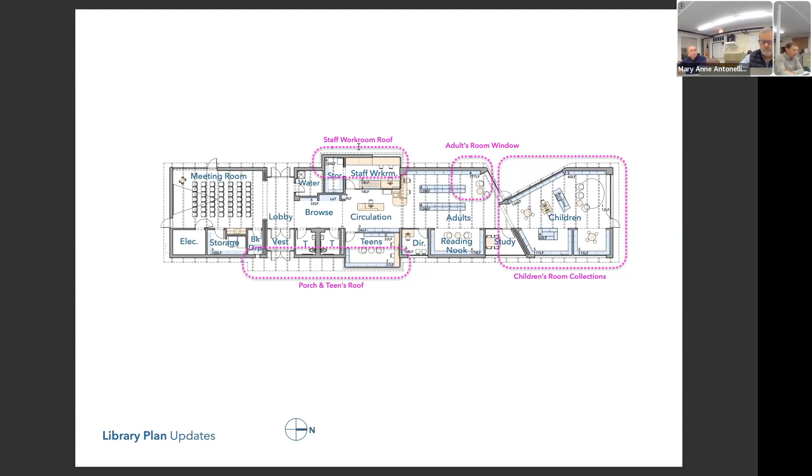In previous discussions, we looked at how we might incorporate additional seating in the adult reading room, including a study carrel with a window. For the roof design, we looked at consolidating the roof so it also covers the staff workroom, porch, and teen room.

Starting with roof updates, here's a view from the northwest showing the original flat roof condition over the staff workroom. We've looked at continuing the gabled roof to cover that portion and unify the roof design. This simplifies the detailing and allows for more efficient construction. The bar scheme of the project and the widening of the staff workroom and storage room allows this move, and it feels well planted as you see it here.

Moving to the northeast view, you can see the entry condition with the teens and porch roof as a flat roof, disengaged from the gable. Here's a revised version where the gabled roof pitches up and creates an upturned roof. This is a great way of managing water and snow at this entry condition. Since we have the porch roof, we need to protect patrons entering the building. This allows for a larger window at the teens room, which we think is a nice moment for that space, and we're again consolidating structural elements. The glulam rafters intercept from the gable and upturn into this entry porch condition.

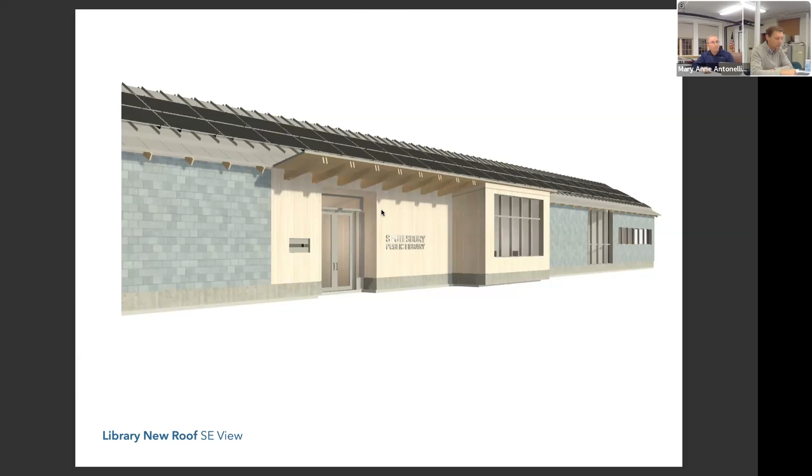Moving on, you see a more zoomed-in view of that upturned roof, and again from the south side. We feel this upturned roof really gestures toward and is an inviting entry to the entry sequence for the building.

Would you see that structure inside? We modeled it here so that the enclosure just folds in and you don't see the structure, but we could look at having it exposed in the vestibule too. It's possible—all of the ceiling material would be sitting on top of that structure, so it's doable.

So this was the last image that we had for the new roof. The next portion will be plan updates.

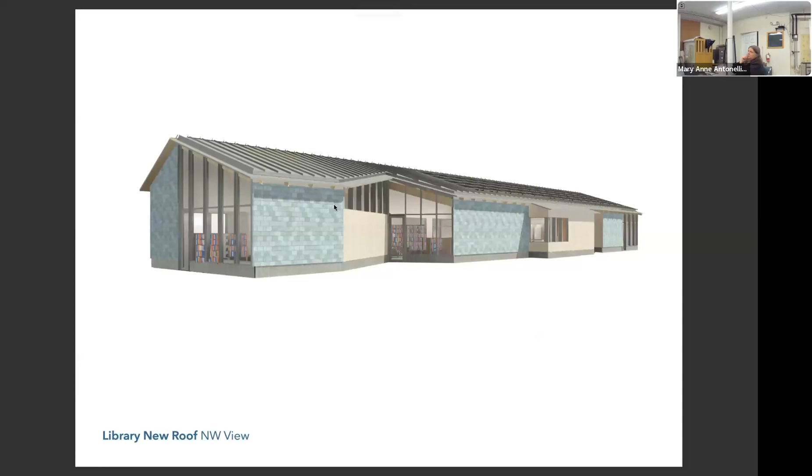We can't have it sloped down because then it doesn't provide the cover that we need at the front entrance. You don't want to enter into the building under a sloping eave. We've got to have some way to stop water and snow and ice from coming off the roof, or icicles collecting there.

So in a way, this upturn is acting like a giant gutter effectively over the door. It's stopping the flow of stuff that's coming off the main roof. It's not dropping down onto a low roof, so it simplifies the construction of a low roof that is then flashing up into a wall.

Every time you have a transition from roof to wall to roof again, there's detail there that has to be worked out and waterproofing that has to be worked out. So by eliminating two of those transitions, we feel like this is potentially a better solution in terms of creating a watertight thing.

But the other thing is the valley where the two roofs are meeting is actually outboard of the exterior wall. So if there was a problem there, you're beyond the exterior face of the building, and so you'll see it. It's not hidden behind a wall. But we also think we can detail that transition in a way that we'll be pretty confident, I think, in its performance.

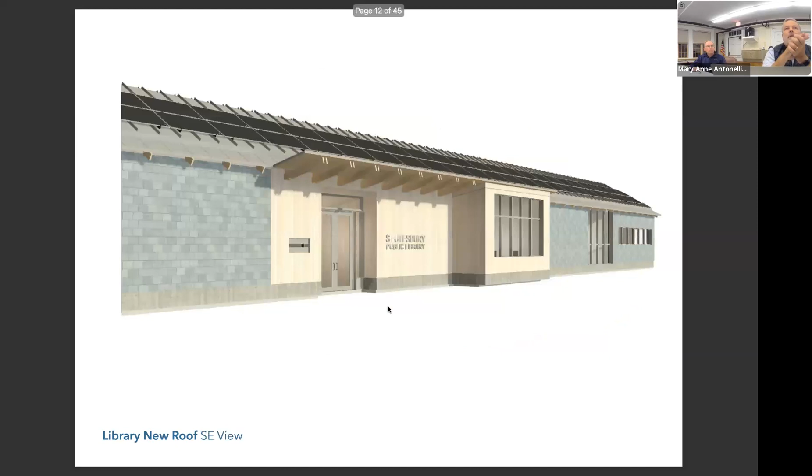So if the whole roof slopes down, but you kind of bend up the corner of the roof over the front entrance, it meant you had a sort of sloping angle, which didn't feel right to the building. But whether it's a kind of folded thing or two different tabs, our feeling was that the length of those segments felt like there was too much going on.

It was a single move - whether it's flat like in the previous version, or like this with the same move all the way across - felt more appropriate in terms of the scale, given the length of the building. It needs something of a certain width that's substantial enough.

It doesn't come far enough off the building because we're limited in terms of the square footage we have available, with 5,000 square feet. So we can't have an 8 or 10-foot deep porch, and so that relatively modest projection needs to be balanced, we think, by some substantial width.

Will you detail that as a porch under the overhang by the door? So there could be a chair under there? That's right, it will be a paved or stone surface - hardscape that would take the whole footprint of that roof.

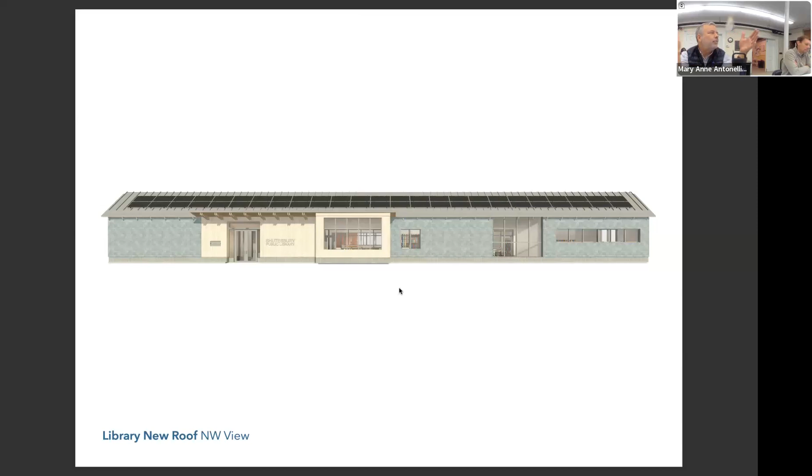I understand what you're saying, and we're limited - the lobby, everything's gotten pinched down. The door is as wide as the lobby is, so it can't get wider than that. We can't get more glass at the front entrance because we don't have the room inside to do that. There's a book drop on one side and a bathroom on the other.

Could we play around with lining that opening with something other than wood? Yes, we could think about what that might be. I don't know off the top of my head what we would do there, but there might be a way to introduce some other material that draws more attention to it.

But our hope was that the wood, as distinct from the slate, combined with the wider roof and whatever is happening at the ground plane paving and landscaping, was a big enough gesture, despite the width of that doorway, to signal this is entry.

So there've been a couple of times, like the teen room is getting more space, the staff room on the other side, the ceiling is higher, and there was more storage. And so anytime I think more, I'm worried about the budget, and I just want to make sure that we aren't doing anything to let this budget creep up, because we can't let the budget creep up.

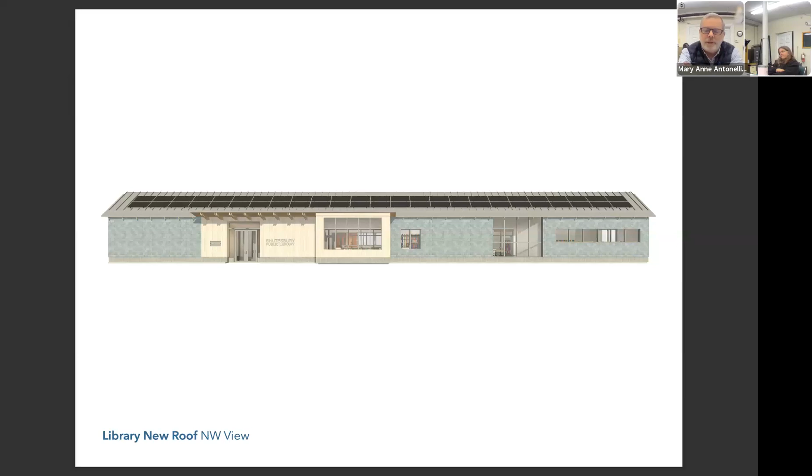I don't think we actually need the heat tape. The heat tape came up in the design subcommittee meeting. Stephen brought it up as a possibility here. And I think we're not gonna need it. I think we can detail this in a way that snow is managed, and Dale, we had this conversation about snow last week.

The way that we're gonna deal with snow at the front entrance is the same as the way we're dealing with snow on the rest of this roof. We don't want the snow to sheet off the building. We want to keep it on the roof. We're gonna have snow rails along the entire length, both sides, to hold the snow on the roof and give it time to melt and drain off as liquid, not slide off as ice and snow. That's the plan, and the same approach would hold true for the front entrance.

That upturn is preventing snow and ice from sheeting off the main roof over the entrance. From there, the plan is that we'll have along the length of that roof a cricket, and we're actually thinking that the back side of that roof could be all heat-welded membrane with tapered insulation to get a cricket in there that's directing water off to the two ends. We're still sort of trying to figure out how we're going to convey water down from the two short ends, but it's very possible that we'll end up with a scupper condition and a downspout there. But that's something we've got to work through.

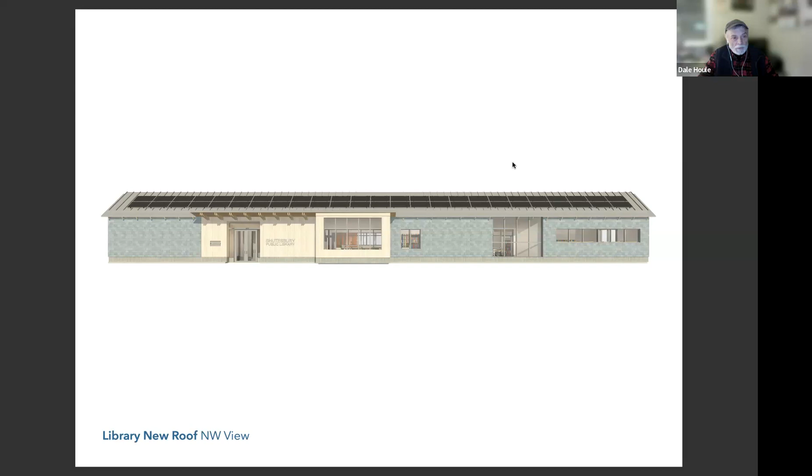Well, yeah, I agree with that. It's just the whole idea of the subject matter. I mean, I agree with everything you just said. Any other questions about the roof before we move on to other items?

Right, moving on. I had a question about windows. Oh, sure. It came up briefly at the subcommittee meeting last week, the idea of stealing one of the windows from the teen room and giving it to the study room or the reading nook. Is that cost prohibitive? It's not, and we are developing ideas around that.

I do have some exterior imagery to show of the adults room. So we were investigating how we could introduce an extra window into the adult reading room as one move. And we are still developing what this teen room window could be. I think there is room here to investigate potentially more solid wall.

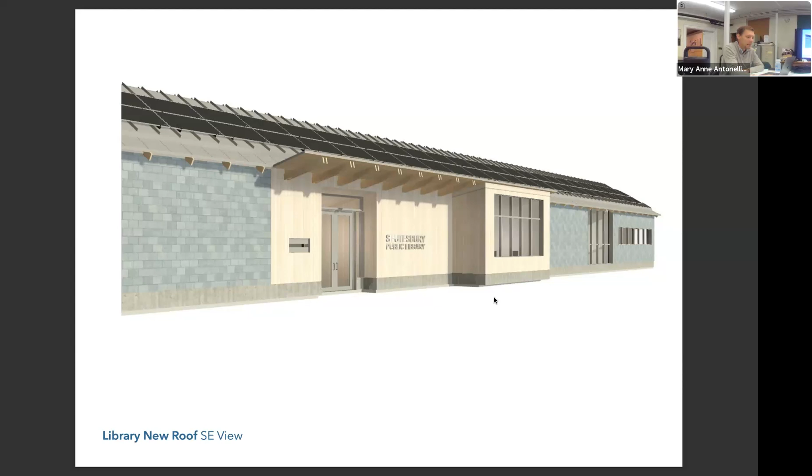And because we have such a large window, it might be able to yield some more collection storage along that wall, and then we could turn over that glazed area to another space. So I'll show you what we've developed—it'll be a few slides down, and we can investigate that there.

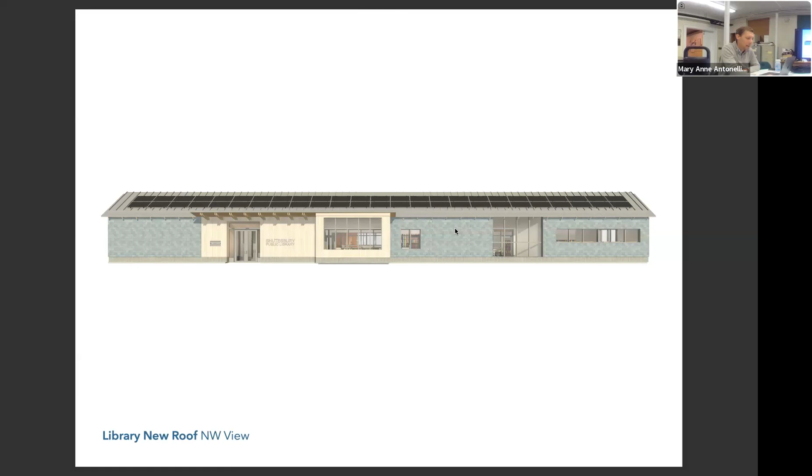We felt, looking at your question specifically about the reading nook, that another punched opening here was starting to be too much on this elevation. We already have so much glass with the study room and the teens. Yes, we could reduce the glazing here, but we looked at a few different layouts, and introducing another window at the reading nook didn't feel as balanced.

Just for orientation—if you go from where your cursor is to the right. That is what space? The study. Oh, yeah, the study. So this is the study room.

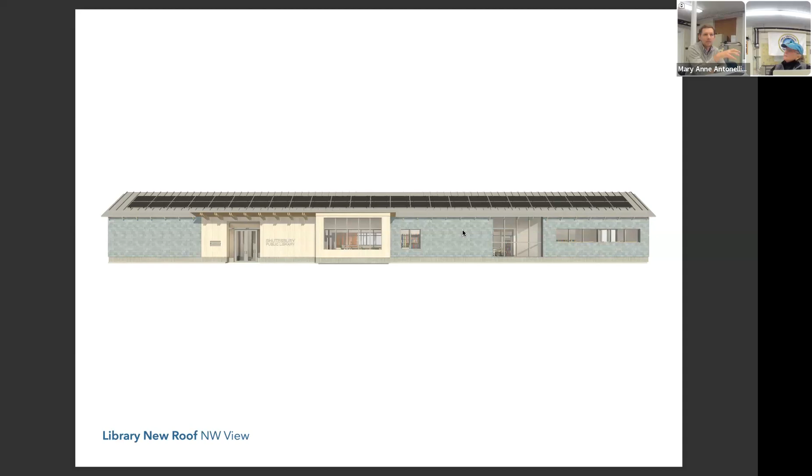The adults' reading nook as well—we're trying to maximize shelving there. We have a good opportunity to do that with that solid wall. Also, when I get to the plan, the way a study carrel at the wall implicates the use of that room a bit, with the soft seating centered there—we felt there's a bit of a clash of people coming in using that study carrel and then leaving. It didn't set up as quiet a space as the reading nook. It would be problematic and useful, so a few considerations there.

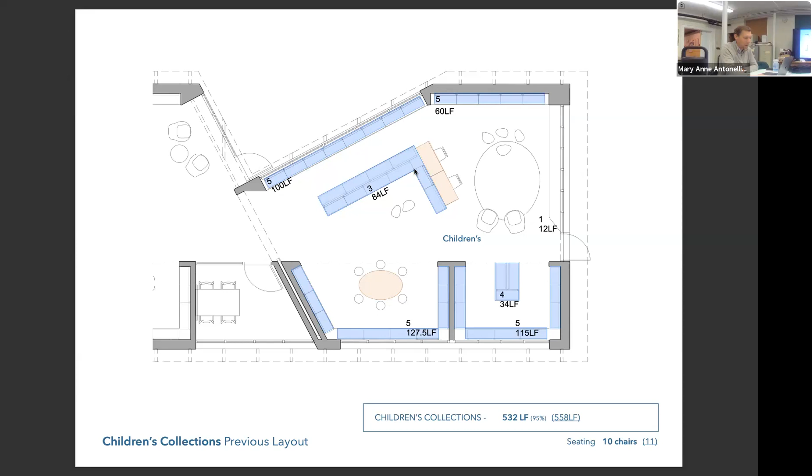Continuing from there, there was a request to make this bank of freestanding shelving mobile. If you look at this, it was a little challenging to incorporate in this layout, because if all of these were mobile, it wouldn't really work as a one-sided unit to close the L here—and we have offset shelving here because of this corner.

So this really streamlines the ability for mobile shelving to be arranged like this. It frees up the children's computer table, and we feel there's more flexibility in this layout in its entirety, while our shelving counts are still at 95%. If you're really considering this open space for flexibility, the current layout sets you up for that—we'd have 3 separate mobile shelving units here in a line, so you're close to the same collections, with more flexibility.

We incorporated 2 tables and chairs here in this reading nook—you could break them open and have different programs here. So that was it for children.

What are you showing along the window? So the window area was originally a bench with shelving, a single row of shelving underneath. We're now considering this as mobile shelving, so there would be 4 banks of 3-foot wide, single-face countertop shelving, but it's only one row high, so it's still about 18 or 20 inches tall—keeping the views to the north out of this window, and again allowing you flexibility.

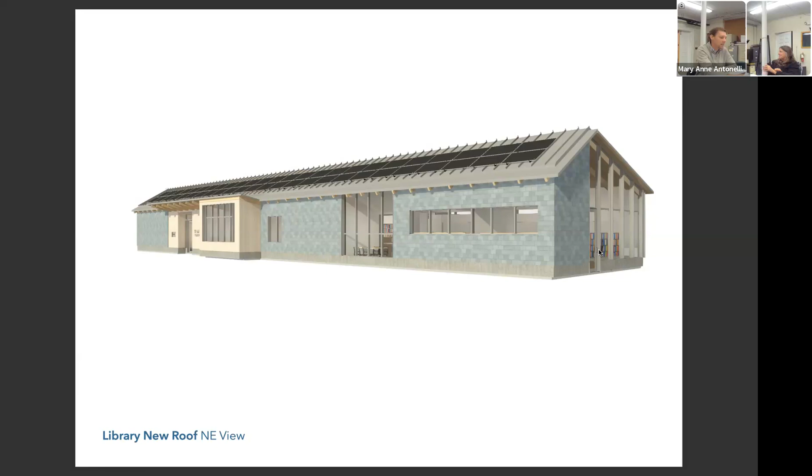I'm also wondering how we treat the jamb conditions. Do we pull the east jamb of that window further west and allow for the tall shelving to wrap across the north, so we can still have a nice full-height condition? We're making that less wide, but you can see in this image that you have that water table condition, and it's a rule that follows around. How we detail this, we wouldn't want a sliver of slate here - that doesn't feel right. Extending the water table up - why don't we look at it and see if there's a way to resolve that condition?

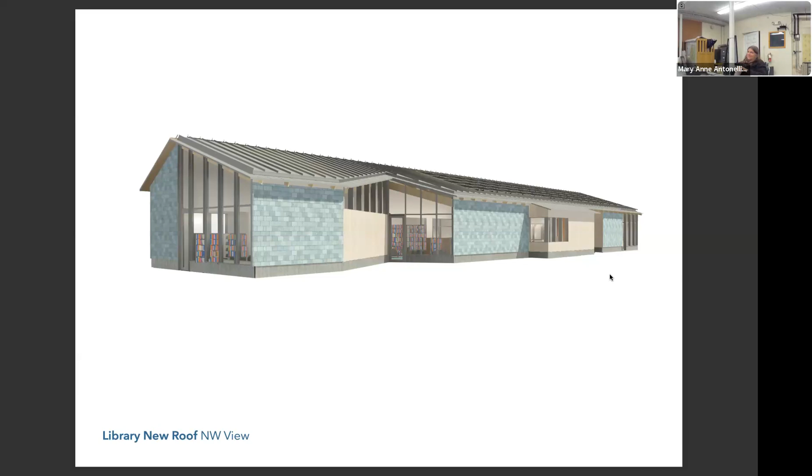Is that your preference, Mary Anne, that it's taller there and that accommodates one row of cubbies and then one row of books on top of that? Or it might just be two rows of cubbies. I could see that being two rows of cubbies. But if it's two rows of cubbies, it's kind of the same problem as if it's one row of cubbies - where does that collection go in that room?

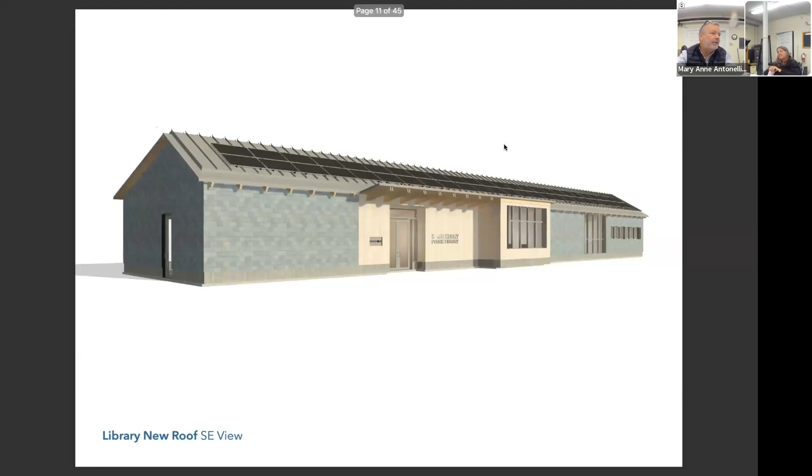Right now, we're accommodating collection there. The collection is not just books - the collection is also things. So the collection is kits, chemistry kits, storytime backpack kits, puppets and puzzles. Some things like board games and puzzles will work very well up on top of the shelving on the sides, but it might be nice if some of the kits fit into those cubbies, since some of the collections are big bulky things.

What I'm asking is, we know we need some collection - whether it's traditional book collection or objects and toys - at that location. Do we know that we need two tiers of collection there? No, it could be one tiered collection and one tier of toys. That's quite a bit of room for toys. Books could be on one shelf, or toys that you check out.

On one shelf, and toys that you play with in the library on the other. So, back to my earlier question, how much of the non-book collection items can we assume are sitting on top of the wall shelves, if any?

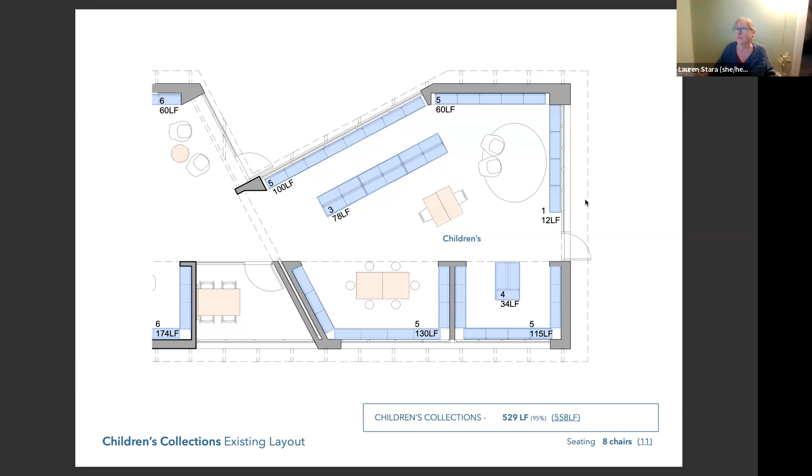I can also see it's gonna be a long time before the shelves are full - we're not gonna move in year one with the shelves full. We'll move in and over time they'll fill up, so some toys could also be on the bottom couple of shelves in that corner. And we might find that nobody ever sits at that table, and we move it somewhere else, or get rid of the table and put some other kind of thing there. So I think there's room for flexibility and certainly plenty of room to start out.

The other thing is that toys, both toys to play with or other things, can be on display on top of that - that's gonna be a flat surface, that row of 3-foot high shelves, the freestanding one. And then this section over here, even in the alcoves, the wall shelving there, you'll have room to put things on. So there's a fair amount of display surface in the children's room - pretty much every surface of shelving, with perhaps the exception of the one at the window.

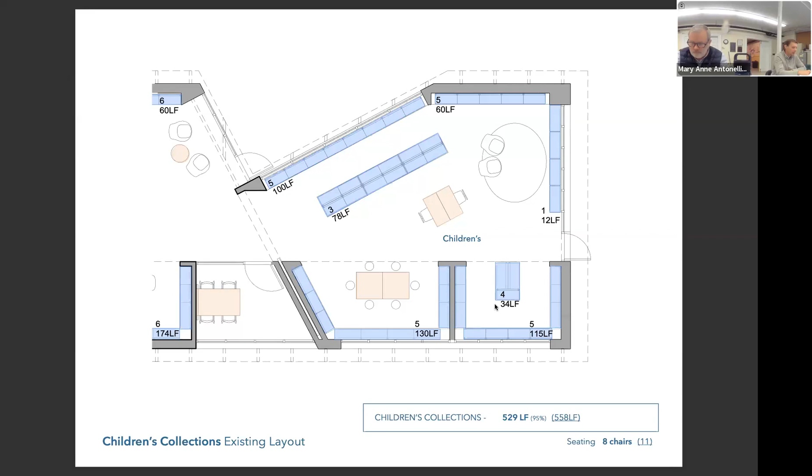So moving on to adults. Here we see a plan of adults, and we've been looking at how we might be able to nest a study carrel in this west wall.

Again, here we were looking at adding some flexibility for patrons, giving them another surface they could sit at. We find that this condition in other libraries is heavily used, and it's kind of a real go-to for people to do some studying or reading.

So if we look at the numbers, this takes a little bit of the collections numbers out, because we've removed some shelving here to open this space up. But we've given adults - there's still the collections shelving that is outside of the teens room. So the teens room is at 100 linear feet, the target is 120, so teens is a little under. But if we give this shelving over to adults, we get to 554, so we're around 95%.

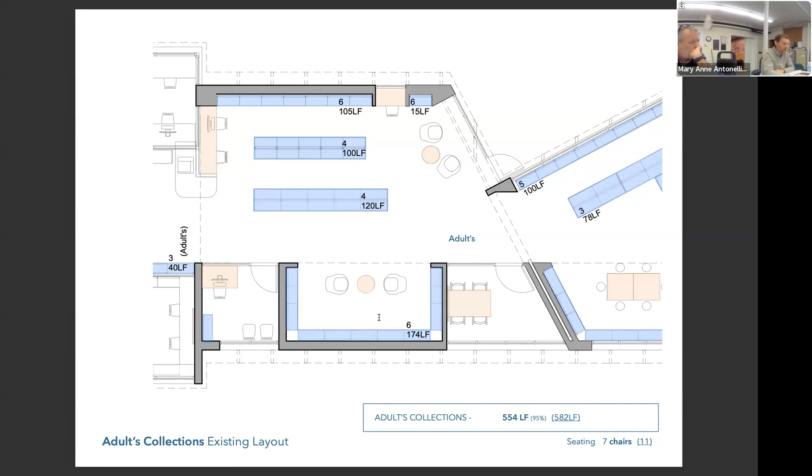Again, Penny, we were looking at conceptually how we could locate a study carrel centered here in this room. We just felt that with people coming in and out, there's more circulation - people would be coming in and out to browse anyway - but that kind of conflicting programmatic use in this, what we consider a more quiet area, in turn with the exterior layout of a window here in the elevation didn't feel right.

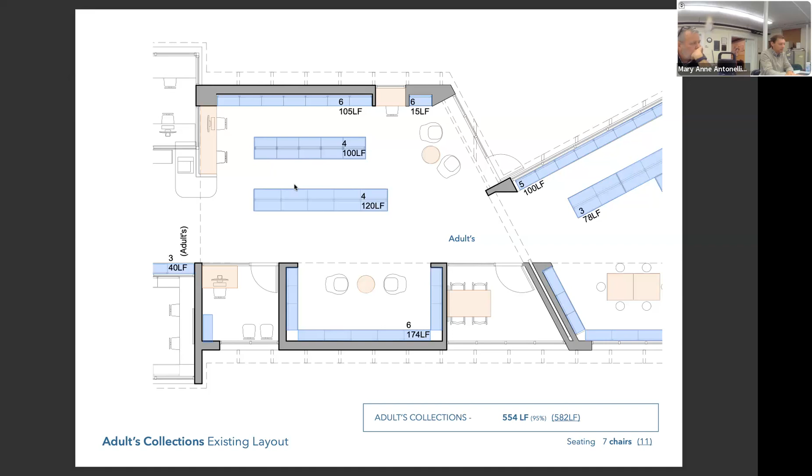So this is the plan. If we go to a cut section, orienting yourself, you see the meeting room to the left here, moving through the adults room, you can see this window condition here, this study carrel. So again, it helps open up this moment here on the north side of the adults room as well, with the soft seating in front of it, that north facing window, and then the study carrel adjacent to it.

Everybody is gonna want to sit there. Everybody. In Norwell, that's where everyone sits, and they're spaces. And it's too bad we don't have enough room and money to do more of those. It'd be great if this project could just grow a little more. Wouldn't it be great? So Powerball is up to, I don't know - did nobody win last night? Not that I heard.

In lieu of Powerball. So we all wish and dream.

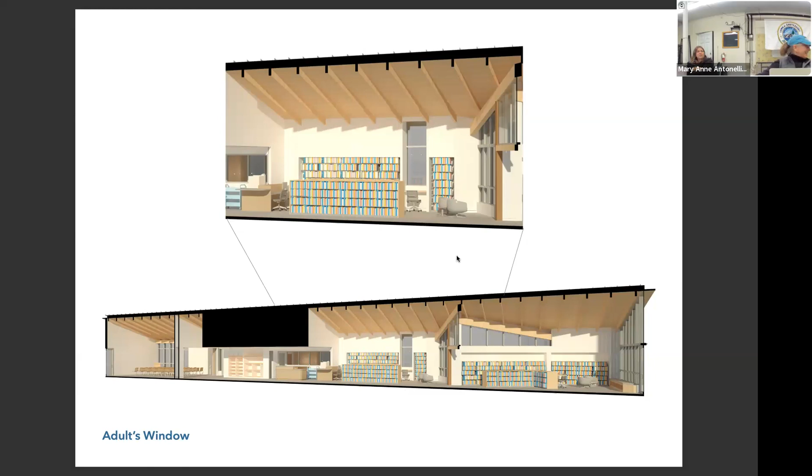Understood, but you gotta know, in that library, that's the only place anyone was sitting. Every single one of those spots was full. You're gonna have to take reservations. Maybe they'll have to pay to sit there. I don't see how you can do more, but wouldn't it be nice?

Yeah, I mean, doing more means reducing shelving, which we can't do. So even doing this was a little bit of a struggle to try to maintain shelving, because the other thing we had to do was pull back the freestanding shelf behind it in order to give enough room for the chair to pull out and have circulation around it. But I think that little seating corner is nicer with the staggered lengths of shelving. We agree with that.

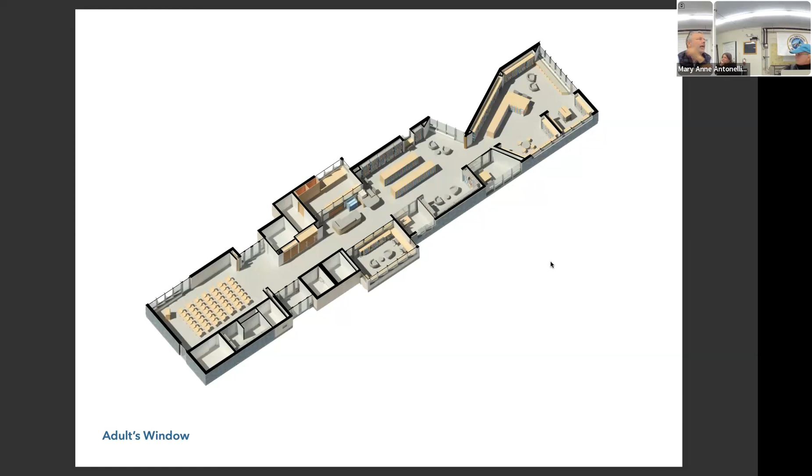So can we talk about the shelving in the teen room? I'm sure that I can suggest a place to put more shelving. I wonder where. No, this is always very fruitful.

So this plan is the updated plan with what we propose for children's and adults and teens. So what has changed here now with teens and the larger opening is it's allowed us to have 5 high shelving on this floor.

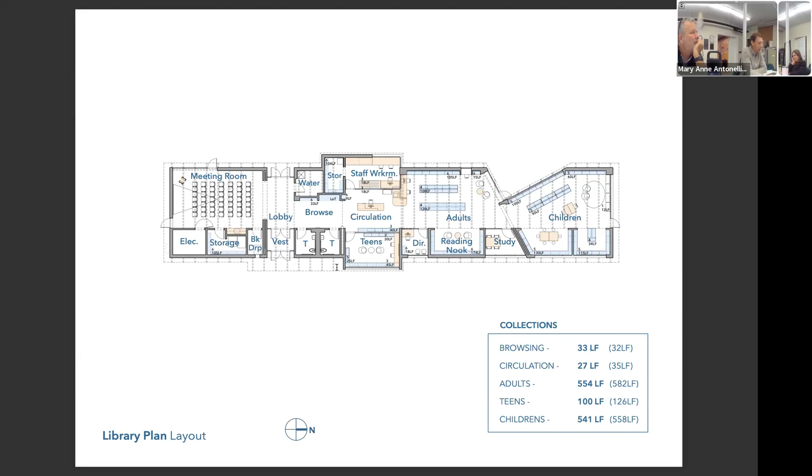Why can't we just have 5 high shelving on the window wall and have the window start higher up? I think that's gonna look a little awkward in that location with such a high sill.

We can look at it and see, but I think we could do a portion of that wall possibly with high shelves. Maybe, to the point that came up last weekend, Jeff raised a comment about that window, and we agreed that...

There's some work still that needs to be done with that window. It doesn't feel like it's quite right. One of the things we talked about was maybe it shouldn't be the full width of the room, maybe it should be asymmetrical. So if it was a third less wide and we gave over some of that wall space for shelving, and we didn't try to do window above shelving, we just said we're writing off this section of wall, and that's gonna be 5 high shelving that turns the corner.

And then we've got a window that drops down, kind of like the window seat in adults, that gives you a point where there's a lower sill and you can see out, which I think will be more pleasant for the teens, but also the circ desk wants to be able to see out that window too. When you're at that desk all day, being able to see into the teen room is important, but being able to see out to the outside is also nice.

That's one of the things about the Norwell circulation desk that we like, is that from there you've got a great view, not just of browsing, but outside, and you can see who's coming into the building, people walking or cars approaching. It just gives you a little more connection to the outdoors and a little more visual control, which we like.

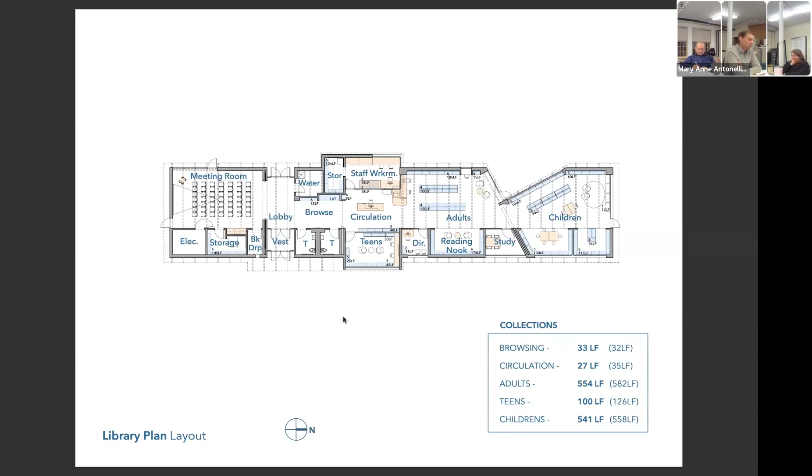All right, nice. Okay, so that concludes the plan revisions, and now on to interior finishes. So again, this process is really to read your temperature on initial thinking, and by no means are any of these finishes or color selections set in stone at this point.

So I shared this plan previously. We have different material finishes here. Resilient flooring in yellow, so the meeting room, storage room, book drop, staff workroom and storage, teens and children's study areas all have resilient flooring. We have a tile zone, which is the lobby, browsing, circulation, bathrooms. And then we have carpet, primarily in adults, also the reading nook and director's office.

We have a surface rug, which is currently shown for children's as well. These rose-colored carpets represent a second choice of finish—a highlight color. There's potential there for that. The white floor finishes are just concrete, sealed concrete. We have a walk-off mat for the vestibule.

Can you explain to everybody the bidding process, where even if you pick a color and pattern, it doesn't mean you're going to get it? That's correct. Jeff asked about the process for public bid and the need to specify 3 or equal, and the fact that you can't really predict which of those 3 or equal, or an alternative, is actually going to be submitted for the project.

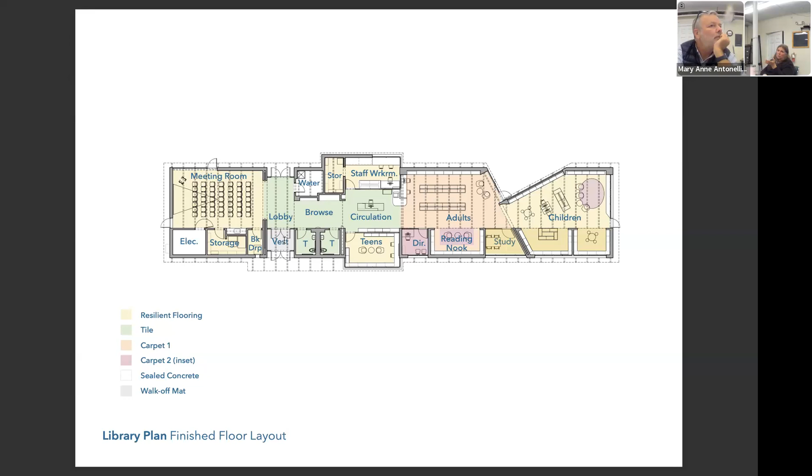Will we have to deal with the rain when we go in and out of those doors, or will they be shielded? We'll have some solution for rain diversion or collection at each of the egress points. We can't have roof overhang everywhere, but we have it at the doors on the far side of the lobby, aside from the front entrance, and at the two ends as well. People will mostly enter and exit through the main entrance, though someone might wander out the children's room door and back in, but not when it's pouring rain or there's ice and snow. Anywhere we have a door to the outside, it goes out to a paved surface, not grass that would be muddy, so if you go out and come back in, you're not covered in mud all of a sudden.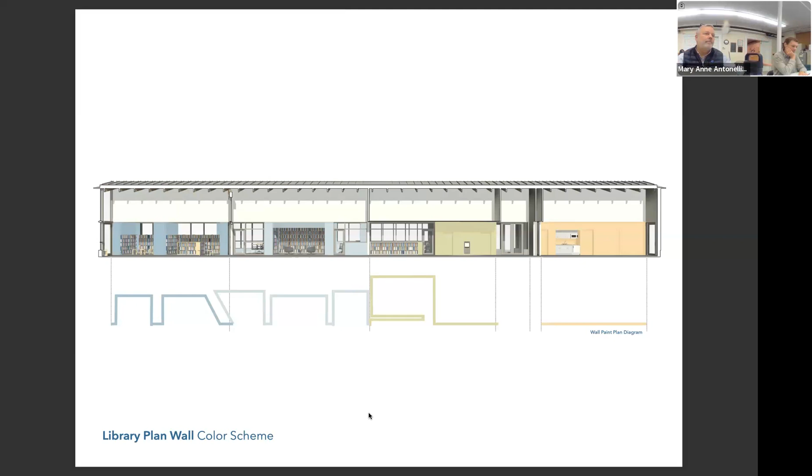So, that's why this meeting really is more about strategy than it is about picking actual materials or certainly colors and patterns. It's how do we feel about the strategy of introducing color in those small rooms as a way to create an identity in each of the different areas. So the meeting room has its own identity as distinct from the adult room. The study room is a little bit different from the main adult room, so there's a kind of hierarchy of space. It's a way to introduce color, break up the run of floor surface, having the wall color then inform the floor color in those smaller rooms, that might be a brighter color than a more neutral floor material that runs through the lobby.

It's not rubber, I think. I think it's lovely. That makes sense. We don't want it to be a uniform color throughout the entire library, but we want the colors to blend into each other.

I like, and I'm sure everybody here has their own preference, but I like more earthy tones, warmer colors. I'm a cool color person. I'm so tired of earthy colors. Let's not talk about what colors we like - that's a long way down and that's gonna be a very long discussion.

Let's do the cost estimate first. I do want to mention that having different colors in different rooms with different functions also helps with intuitive wayfinding, and it's much easier to say, this is for children's, go to the green wall or whatever - it can really help with navigation of the building as well.

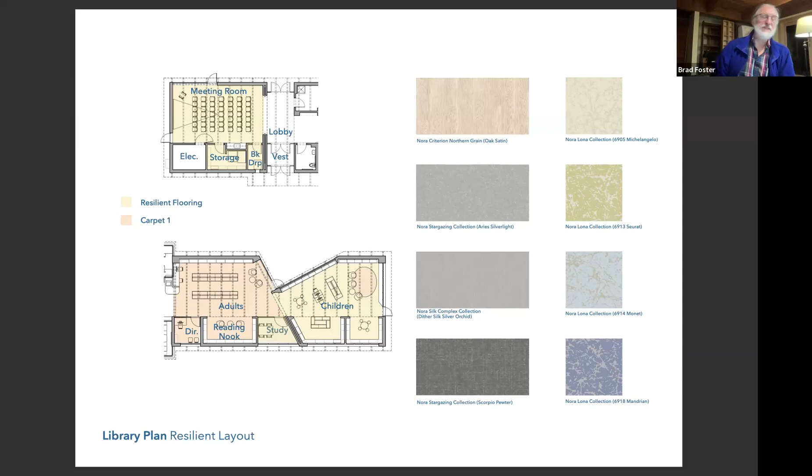So, Brad, do you have a question? It's not a question, I just have to go. I've got other things I've got to do, and I'm sorry I can't keep going tonight, but it's been great joining you. Okay, thank you, Brad. Thanks, Brad.

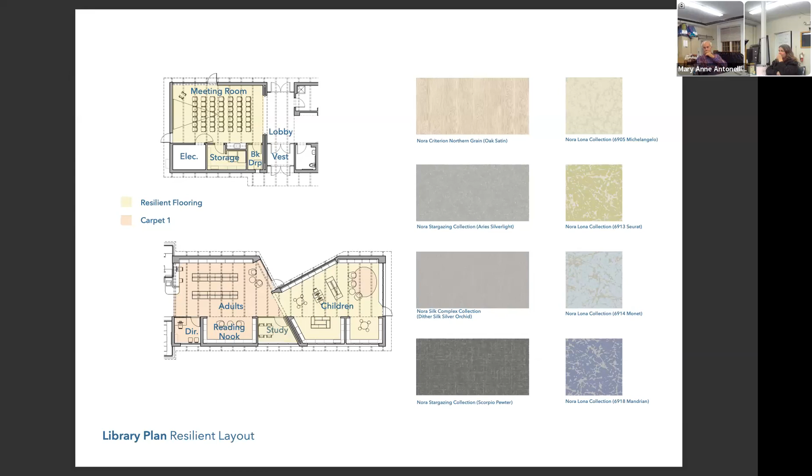So I've included some imagery of some of the samples that I showed you in the intro slide for the LVT. Here you see the wood grain. This is just a different image to show you the floor.

This could be an accent color. I like those colors. And again, a different color. I like that - but again, the concept is not having both colors.

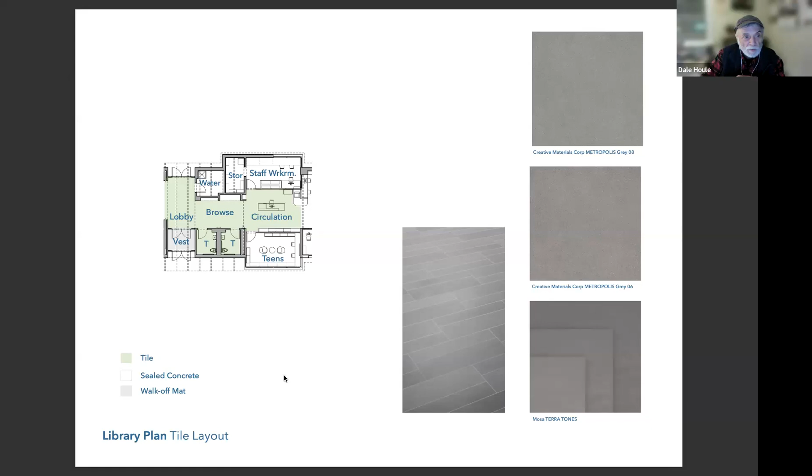And then to tile. Yes, Dale, before I move on - the concept is, I would support your concept, it's valid. I mean, the idea of what you're achieving with color here, I'd support that. Thanks, great, thank you.

So for tile, again, we feel like a cooler tone for the lobby. It also disguises some dirt and dust, which goes a long way against a super light color. We don't want to go too dark. We have specified Mosa Terratones in the past, but it might be a little too dark.

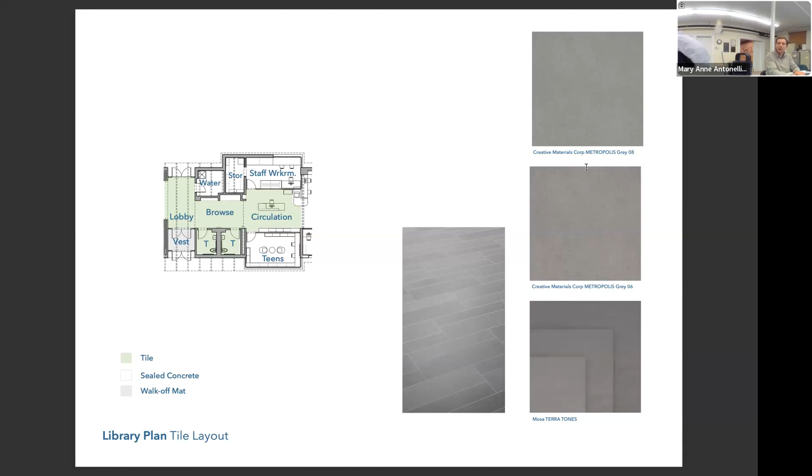We have some options here. Metropolis has a few gray colors, which are a little lighter. So we can go to that. Or it should be - there's kind of an in between, a happy medium, like a mid-tone. This one seems lightest - really slick to me. You'd actually want a higher coefficient of friction, a non-slip rating.

These tiles are gonna have grout joints with grout in them, is that correct? That's correct, yeah - and Andrea is pretty ferocious about this. We strongly discourage light colored grout because when it gets dirty, it's gross. We would probably try to match the grout with the tile color, or even a slightly darker color, otherwise it's impossible to keep clean. Thank you.

My library has tile that is not textured, and we don't have a problem with it. The porcelain tile, although it feels smooth, has very good slip resistance. I don't know what it is about it, but it works - they tested it, they use it a lot in laboratory locations where things might get spilled on the floor, and it's a good material for that.

This Metropolis Grey 06 we liked as a placeholder because it had a green hue to it and it was tying in the slate. What's the color on that again? It's slate green. Matt, what's the slate color? The unfading green - that's pretty close in color to the slate. So we felt there was a nice idea there. It doesn't mean we're settled on this yet, but that was a nice concept.

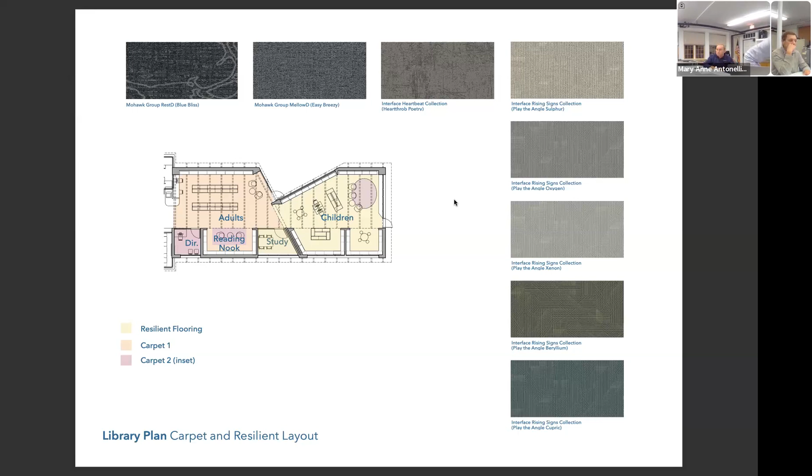So this carpet actually comes in planks, not square tiles. Interesting, so this is an actual carpet tile, unlike some other manufacturers. We don't know what manufacturer we're going with, so we shouldn't get too attached, but I think the idea is you can kind of see in the top color, so that floor is this - like where it almost looks like a contour map or something.

The idea is having enough texture so it doesn't feel so uniform down the length of the building. It has a little bit of variety to it, but subtle. This one - you can see the white ridge going, that's the edge of the forest, and the flood. This has enough contrast and sort of asymmetry in the pattern that it doesn't feel too monolithic and uniform throughout.

We think the mid-range neutral for the main carpet, whether it's gray or an earthier tone, is good, but having a little bit of pattern we think will help. Doesn't having pattern help older people with perception, being able to walk better? I don't know, that would be interesting to find out.

The angled one - we thought it played well with the angles cut in the building, and it's a pretty subtle pattern, but again it gives you just a little bit more visual distinction as you move through instead of a more uniform pattern.

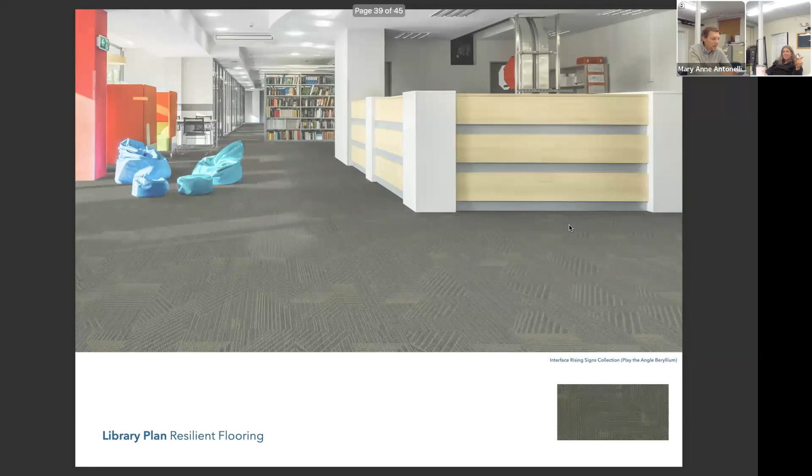This one? Yes, when we showed it. I like that. Really? This one - I didn't think I would. We're gonna need two adult rooms. Which one did you say? The Beryllium one? This one. I just thought it looked like that. Yeah, I like that one. I don't - I just like that.

This pattern also has a variation - a color version that is a little less contrasty. It almost looks like maybe a little less gray. You know, I think it comes in a color. Brown? It comes in colors also. I don't know if it comes in - well, we'll get the book for it. We're not gonna talk about colors today, but I'm clear they're not gonna let me do brown.

In terms of stain resistance, I think they all have some - this is soil stain protection, ProTech 2. I have no idea what the ProTech treatment is, so we'd have to look into what ProTech is, and they'll all have literature on these things, so you're not the first person to ask how they protect it from stains and what that means.

We will have to get more information on all of that stuff, but it's not like they're gonna treat it with formaldehyde to keep it from staining anymore - nobody does that. I don't know if we ever did that. We would put formaldehyde in carpets? Really? Yeah, there's formaldehyde in a lot of stuff.

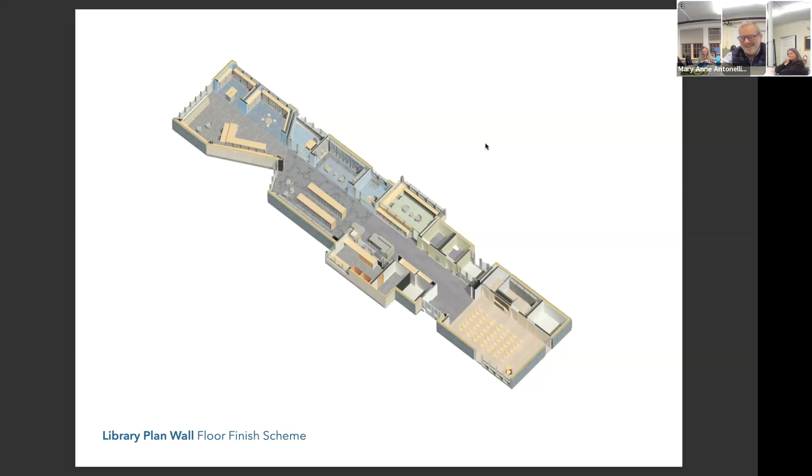We can move on. I think this was our last slide, right?

I have on the agenda, notice of intent. Are we talking about those things tonight as well? They were on the agenda, I just copied it off the website so that way if something comes up we have it. We're legitimately not quite ready to talk about that, I'm still gathering more information. We're not quite ready to talk about the notice of intent. Okay, what else is on there?

Committee liaison reports, we don't have any of those. And then other and unanticipated business. I can't think of anything, can you? No. Okay, other than the meeting schedule. Right, the meeting schedule, which is here. That's a good point. Yeah, okay, so what's next?

Our next meeting is the 25th for the subcommittee meeting, and I think we talked about the first week of November as the next building committee meeting, which will be a sort of page-turn through the design development pricing set. So the full committee won't have a chance to weigh in on further conversations that the design subcommittee has before it goes out.

We could issue it late, by the 25th. Prepare the decision-making. I guess tonight is the last chance for decision-making in preparation for DD, let's say. And we have all the CDs after that.

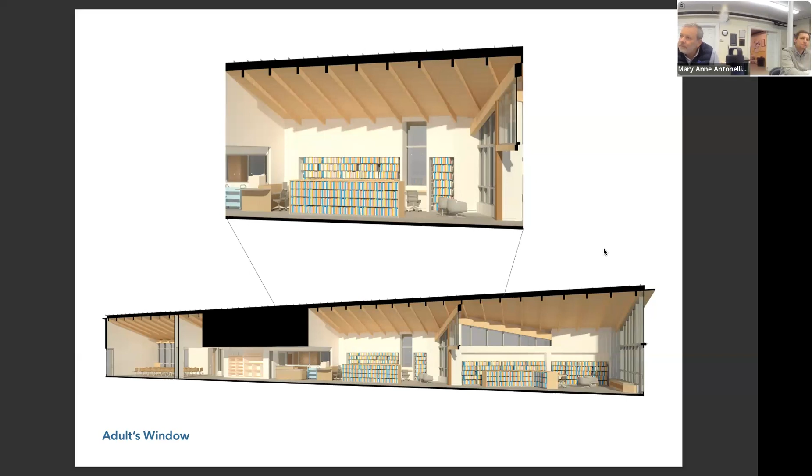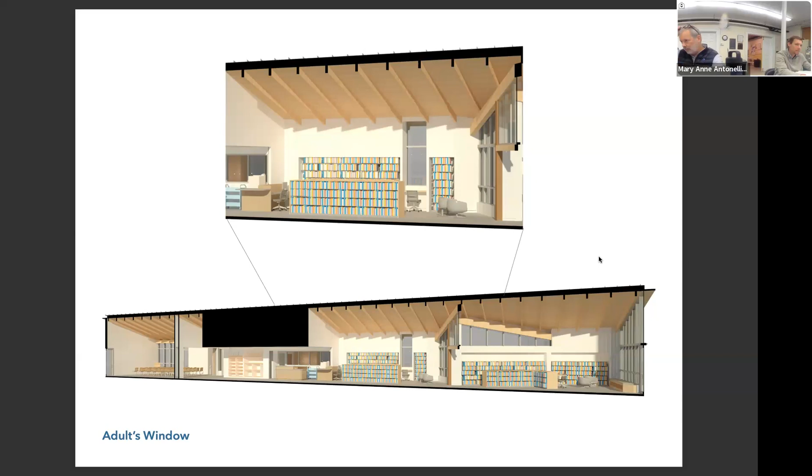Anything else? That was it for me. Does the OPM go out and get the commissioning agent? What is the commissioning process? Because the commissioning agent should be involved with the CD. What is a commissioning agent?

They are going to make sure that the building is functioning the way that it was designed. Is it during construction or after construction? There are some point visits where they come in before construction is complete, but the heavy lift is after construction.

So also the punch list at the end is making sure that a lot of the air conditioning mechanical equipment actually works, a lot of controls, adjustments and balancing, checking that the balancing of the HVAC system is done per specs, and the lighting is working the way it's supposed to, controls, everything works the way that it was described in the specifications.

So then they come back and have to adjust 6 months later, a year later. Oh, they can also be involved in the beginning, at the point of product selection.

Yeah, they'll review the CD drawings. They just don't come on site then, when you start construction. Are you guys on site during construction, or is your job done at that point?

No, we're here. We're anticipating weekly construction meetings, so we'll be here. Are you here during construction? Yeah, he's here 40 hours a week. Okay, you're going to be living in Shutesbury for a while.